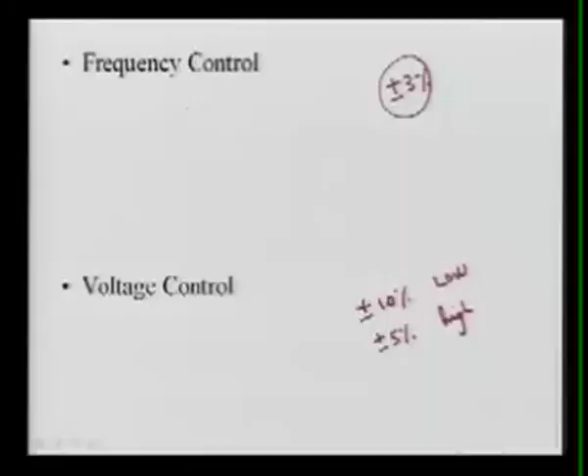So in the modern age, we must operate our system very closely to its rated value. Again, we know all over the world we have two types of frequencies, two levels: one is 50 hertz and another is 60 hertz. 60 hertz is basically used in the USA and Canada area, however the 50 hertz is used in Europe, Asia and most other countries.

So for this nominal frequency, we are talking about plus minus 3%. In the Indian case, we should operate our frequency range within 48.5 hertz to 51.5 hertz. But normally the frequency sometimes even goes below that, and that is not good for the system operation.

If frequency is less, no doubt apart from the requirement for electric clocks and control units, along with other requirements, if you are still operating below that, then it may create system stress, and that may give poor reliability of the system, and also your system may not be stable, and it is very near to the verge of collapse. So our intention is always to operate within plus minus 3%.

This frequency can be controlled in two ways. Active power control is possible at the generation and the load level. This active power is directly related to the frequency throughout the system, so to control the frequency, we must control the real power or active power. In the whole system, we only have two sorts of controls: we are injecting power through alternators and consuming power through the loads. So we can have a complete power system.

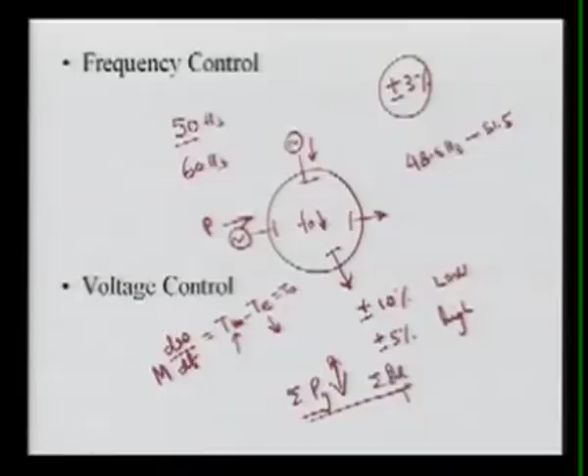And the reverse is also true: if your P generation is less than your demand, what happens? You are drawing more power than your input, so you have an energy deficit. More demand, less generation means the excess demand required is met from the kinetic energy stored in the system, and therefore the frequency of the system will fall, because the kinetic energy is reducing, meaning there is a reduction in speed, and therefore in frequency. So this is true: if the total generation is more than total load or demand, frequency will rise. If your total generation is less than your demand, then frequency will fall.

So the real power is the main source to control the frequency of the system.

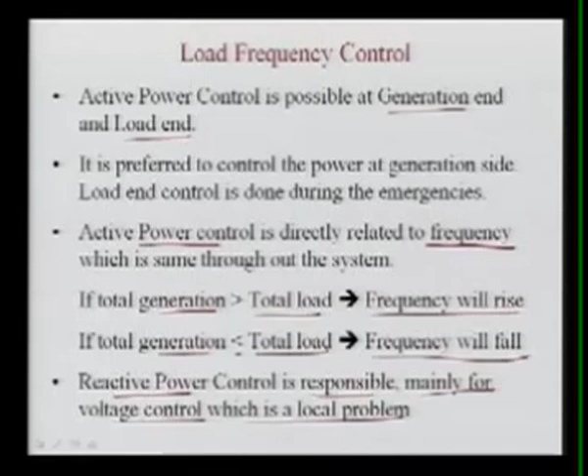This reactive power means we have two powers in the system: real and reactive. An alternator or generator can generate real as well as reactive power, and load can consume real and reactive power. Reactive power control is responsible mainly for voltage control, which is a local problem. This is your load frequency control.

Now how can we control the loads? To understand load frequency control, consider a system where generators are connected into the complete system. A generator can be connected with the rest of the system where several generators are operating in parallel, called an interconnected system. There is also a possibility that a single generator is feeding an isolated load, called operating in isolated mode.

If it is in isolated mode, the frequency variation is not of great concern. But if it is connected with the rest of the system where various generators are operating in parallel, the frequency is very much regulated.

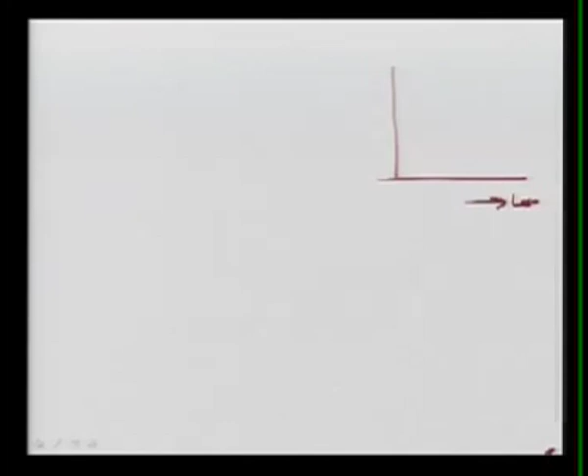Let us suppose here the characteristic: normally all generators are equipped with a speed governing system. Here this axis is your load - if you are changing the load, what will be your speed? Speed is directly related to the frequency of the system.

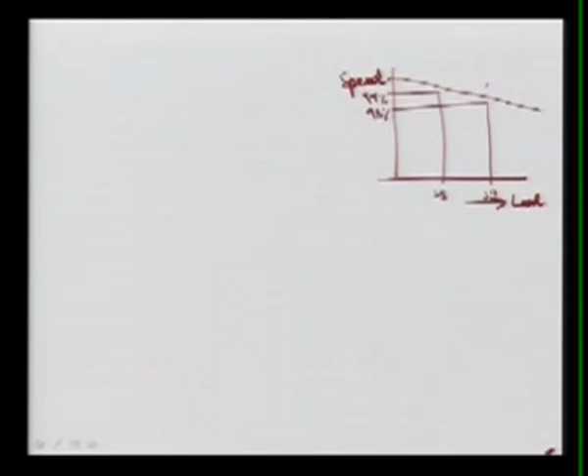This characteristic is normally a falling characteristic. If your load is here, let's suppose 25%, here it is 50%. Now if we are at 100%, at this point let's suppose it's 99% of speed, here it is 98%. So if your load is increased from no load to load, the frequency of the system will fall - the frequency of your generator will fall.

So you can see by increasing here 25% or 50%, frequency is going down. Then what happens? The governor will try to lift, to increase the speed by increasing the prime mover input, and finally will settle to the frequency.

So there is some control, and normally it is a closed loop control. I will discuss the details about closed loop controls. There are various levels of control, and it will try to raise the frequency and maintain it at its rated value - that is the nominal value, or 50 Hertz in our case.

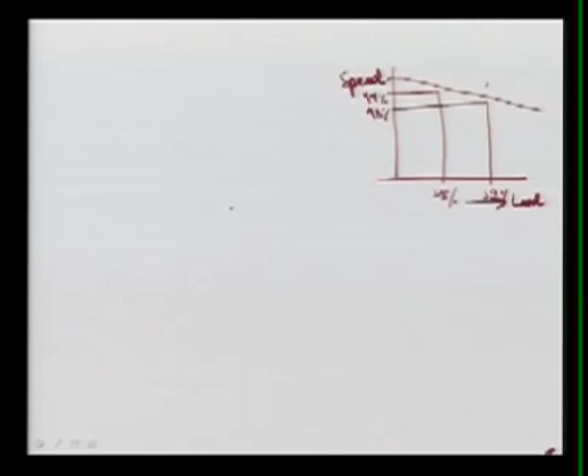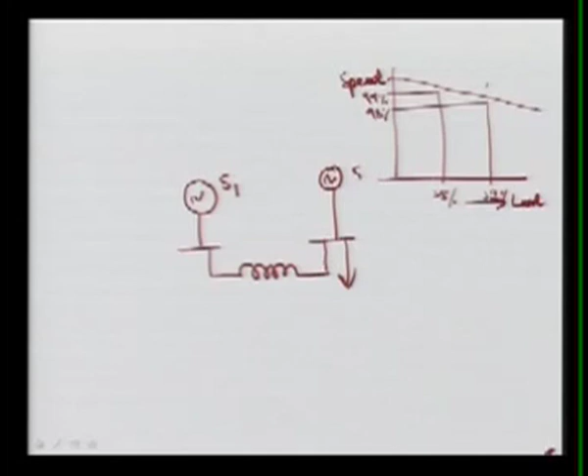Now the load frequency problem - let us see the various types of frequency control we can categorize. Let us suppose we have two generators connected with a tie line, and they are having loads and feeding their own area. Let's suppose this is your S1, this is your S2 generator, and these are the loads - here load, and here also load.

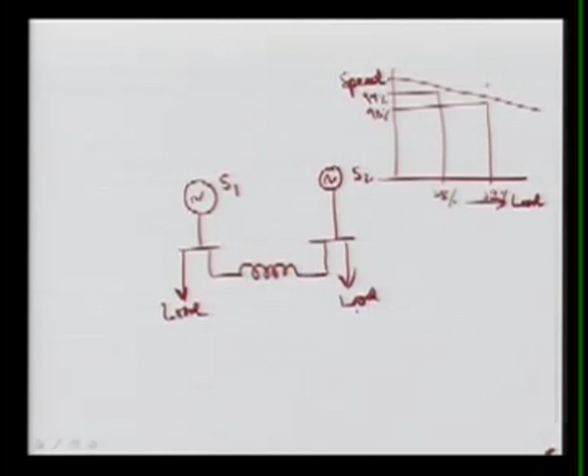Now if there is any change in the loads either at substation S1 or S2, if only one generator, let us say S1, is responsible to control and meet that demand - if load is increased, the system frequency will fall. Then S1 will try to increase its generation, since total generation must always equal total load or demand.

So if the load at generating station 1 is increasing, and only one generator is responsible for taking care of that load increase, then it is called nothing but flat frequency regulation.

The main advantage of this is: whatever load is changing, S2 keeps operating at base load while S1 takes care of the load change. If S2 is very cheap, it should keep operating at its maximum value, while expensive generators like S1 should change their output to meet demand. So we can have economical operation in this sense.

But the problem here is that all the changing load is met by S1, and there is a huge excursion and huge loading that comes on S1. So both advantage and disadvantage of this scheme are there.

Now the other possibility is that if the load is changing anywhere, both generators take care of that increase together. This type of operation is called parallel frequency regulation.

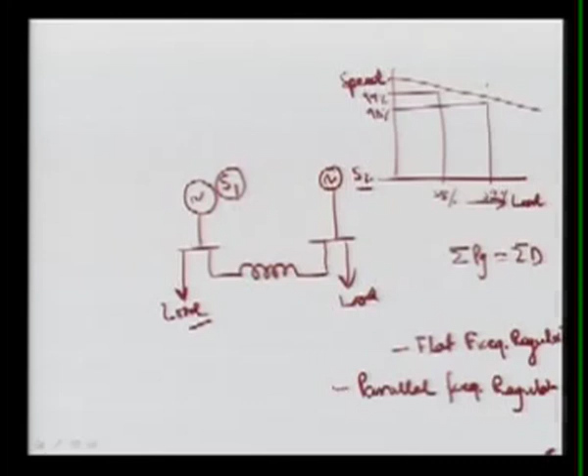The third possibility is that if a load change occurs in a particular area, only the generator in that area is responsible for meeting it. If load changes in area 1, S1 is responsible. If load changes in area 2, S2 is responsible. This is called flat tie line loading.

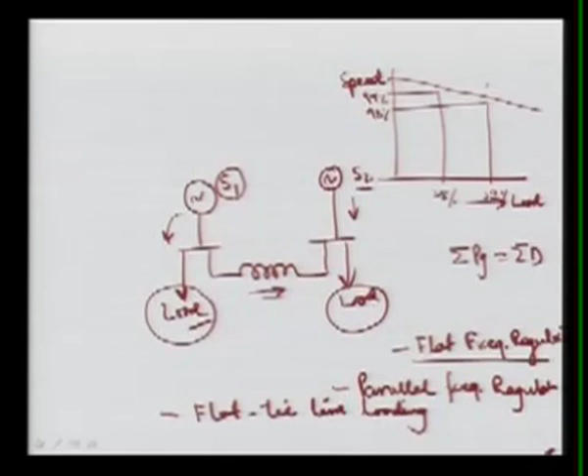This means the tie line power is maintained fixed and not changing. However, in flat frequency regulation, if load here is changing and S1 is changing, then the tie line power is also changing, so it is not flat. No doubt if load increases here and this generator changes, there is no change there, but since this generator takes care of load change in both areas, it is flat frequency. In flat tie line control, we maintain the tie line power flow constant, and the load change in a particular generation area is taken care of by that particular generator itself. If changing in S2 zone, then S2 is taking care.

Normally, if two big areas are connected by tie lines, we try to maintain the tie line power to its scheduled value unless there is some disturbance in a particular area. If one area is in an emergency state, it can request more power, and we can stabilize both systems.

But in normal practice, it is not only one generator; most of the generators take care, and now parallel frequency regulation is very prominent. This means all the generators change their outputs to control the system demand and maintain frequency. This is called parallel frequency regulation.

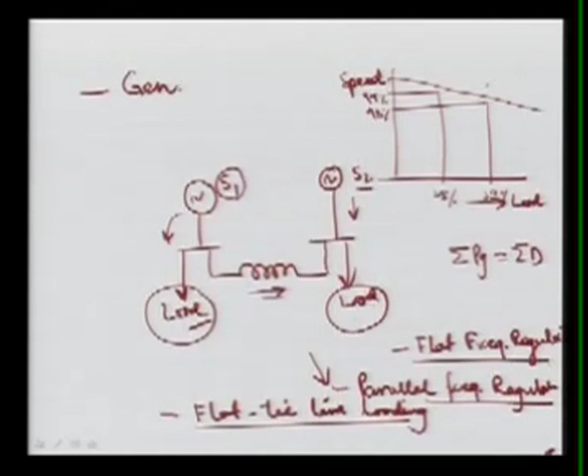Now it is clear that to control the frequency, we must utilize the control aspect of the alternators or governors. As I said in the beginning, we have two possibilities to control frequency: one is your generator output, and the second is your load aspect.

If your operating frequency is higher than your nominal frequency F0, what does that mean? It means your load is less and your generation is higher. So you can reduce the generator output to match the demand and reduce the frequency. Another option is to increase the load to again balance generation and load.

Now increasing the load is not in your hand. It is very difficult to increase the load unless you ask somebody to take more load, but normally this is not practiced. Load increase is not possible, so what we do is ask the generators to reduce output to maintain the frequency to its rated value.

Similarly, if your operating frequency is less than your nominal or rated frequency, which is 50 Hz in our case, this shows that your generation is less than your demand. So instead of reducing generation, we can increase the generation, or we can go for reduction in the load.

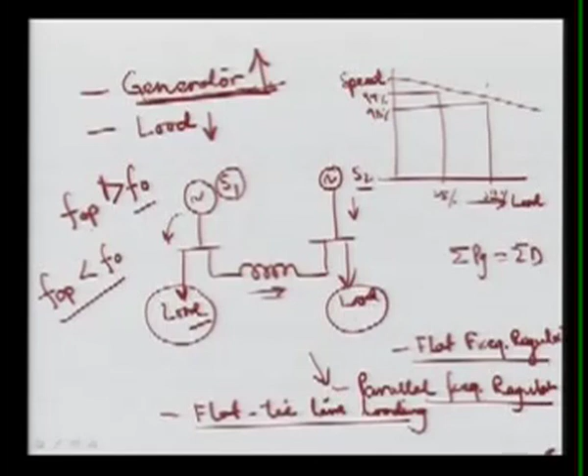So normally we go for generation control, and the generators are equipped with governors. We will see how the governors work through the generator control loops. In generators, normally we have two loops: one is the control to the turbine input, where the inputs are steam, gas, or water. These load frequency or generation control loops are known as load frequency control. Different names are used in the literature, but the purpose is to control the system frequency, so it is also known as the LFC problem.

Or it can be called automatic generation control. AGC is also very popular, and sometimes people call it automatic load frequency control, ALFC, or here we can call it megawatt frequency control loop, because we are changing the megawatt, frequency is changing. So we can say megawatt frequency loop.

Another control loop in the generating stations is called excitation control, and that is related with the control of the voltage of the power system. So the excitation control is also known as the AVR, because we are controlling the reactive power with the help of excitation, and what we are achieving? Zero voltage error. So it is called QV control.

This is very fast because there is no rotating part. However, the ALFC or AGC, that is frequency control, is a slow process, because the turbine inputs, and turbine is a mechanical device, rotating, coupled with alternator, and then electrical power output comes out. So the dynamics and time constants of the turbine, the steam pipes, steam flowing, as well as the alternator are accounted for. So this is slow. However, this excitation control is very, very fast, because we only have the exciters, which may be static exciters with no rotating part, so it is very fast.

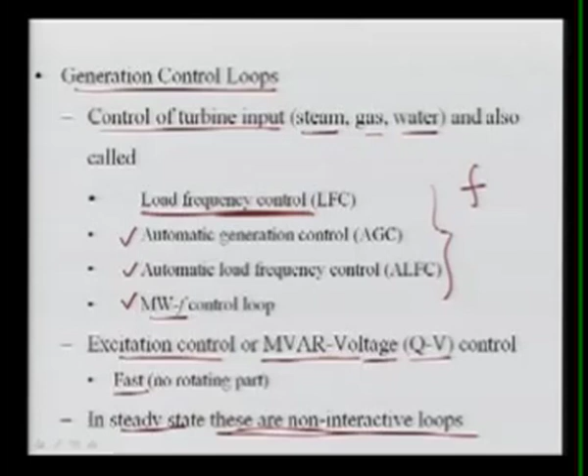To see here, now look at the various control loops. This is your alternator. This alternator is coupled with the turbine. There will be several stages of turbines depending upon the output rating of your alternator. If you are using a 500 megawatt alternator, then there are 3 turbines: high pressure, intermediate pressure, and low pressure. So there are 3 stages of turbines, all coupled together, written here as the turbine system. This turbine system is a mechanical rotating device.

The input to this is steam, and since there is an expansion of the steam, work is done by this turbine on the system. The turbine will try to rotate, and it will try to rotate the complete mass of the system, and the alternator will be rotating with the help of the turbine shaft, finally giving the power output, that is P.

So what is happening? Now to change the speed, we have to change the input flow to the turbine, and that input is steam in thermal power stations, gas in gas power stations, and water in hydropower stations.

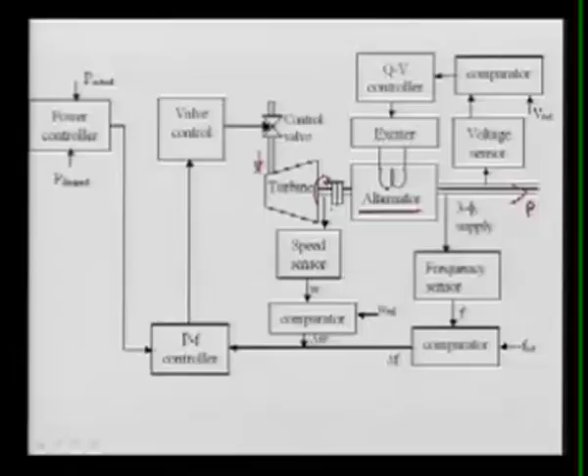So to control this, we have to measure the speed of the system, or we can measure the frequency of the system. Here we are measuring the speed with a sensor, and this omega is coming. This omega is compared with its reference setting speed, and if there is any change, we get an input signal, that is change in omega, which is basically the speed. This is then fed to the power frequency controller, and this controller changes the valve control unit.

This unit will try to change its input to the turbine, meaning it will open or close depending on the requirement. If the speed is higher, this value will be positive, and the controller will try to close the input to the turbine, reducing the steam passing through it. So the mechanical power is reduced, and finally the speed will settle down to its rated value. In other words, if frequency or speed is less, this will try to open more, so more steam will pass, increasing the mechanical input to the turbine.

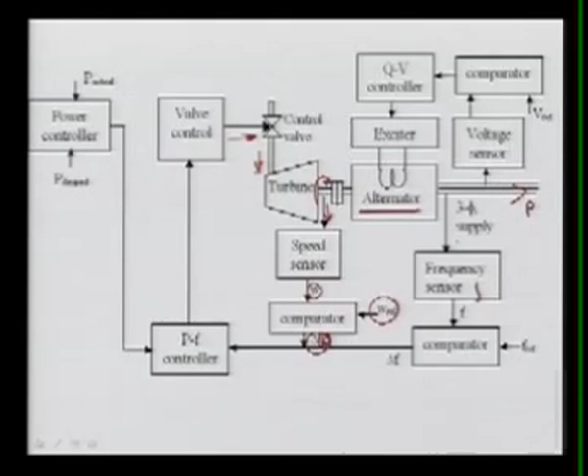Another way is we can sense the frequency of the system, since it generates a three-phase supply system. So frequency is measured, and this frequency is compared with the reference setting, the rated value, or F0 of the system supply. If there is any discrepancy or mismatch between the measured frequency and the reference value, we get another signal, and that signal also comes to the PF controller.

So this control is basically called the real power frequency control loop. So you can say this is a loop, here this is a loop.

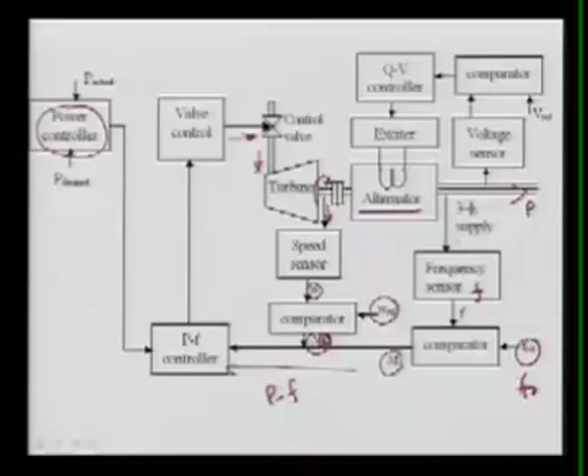Now, normally the system is equipped not only with relation to frequency. Sometimes the utility wants to increase power irrespective of system frequency, meaning they want manual control, as opposed to automatic control. So if you want to change the output of the alternator manually, we use what is called the power controller. If you want to increase the power, we measure the power output, and if there is a difference between desired and actual, it goes to this controller which tries to correct it.

So here we have both automatic and manual control, normally called the raise command. We'll again see and model the governing system, which is basically related to the governor. Valve control is nothing but the governor system, meaning we have to move this mechanism so that the input to the turbine can be changed.

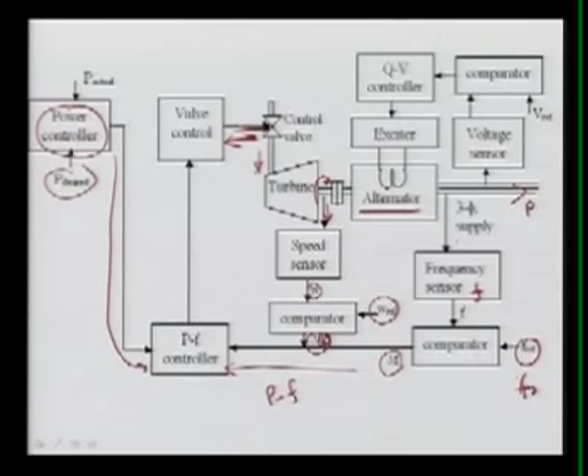So this whole system I discussed within this boundary is called the real power frequency control, or LFC control, or ALFC control, or AGC, and so on. Another control loop is where we sense the voltage.

This supply voltage is sensed, we measure the system voltage, and use a comparator to compare it with a reference value. Normally the terminal voltage of alternators is set at a pre-specified value, maybe 1 per unit or sometimes more. If there is an error signal, meaning a change in voltage is required, the QV controller acts and changes the excitation system, which changes the excitation of the alternator and thus the terminal voltage. This loop is called the QV loop, or sometimes the MVAR voltage control loop.

Now let us see how we can achieve active power control. In this load frequency control loop, we have three major parts: one is the speed governing system, normally called the speed governor; another is the rotating component, consisting of the turbine and the generator, which rotate due to mechanical rotation; and we also have the load and the power system.

So we have these three major components to classify: the load frequency control loop's speed governing system, the rotating components—that is, turbine and generator—and the load and power system, which is the electrical part. The turbine and generator, being mechanical, are modeled together as rotating components. Then we model the speed governing mechanism and its characteristics, and then we model the load and power system together, so we can analyze these control loops and see how load frequency control works.

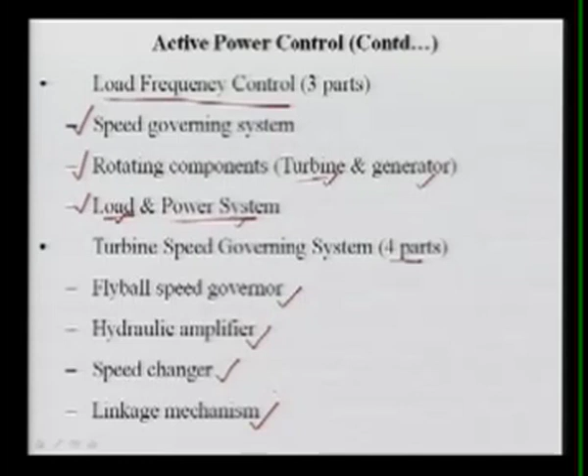Now the speed governing system, or turbine speed governing system, consists of four parts: first is the flyball speed governor system, hydraulic amplifier, speed changer, and various linkage arrangements. To see it, you can look at this diagram.

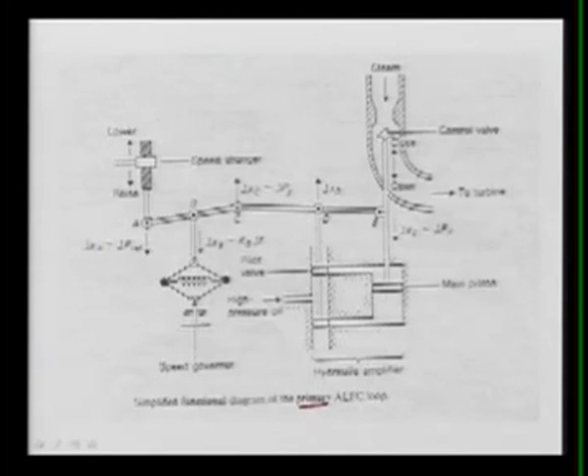This is basically the simplified functional diagram of primary ALFC. I'll explain later why it's called primary, because there are primary and secondary control loops, and this is called the automatic load frequency control loop. To understand this, the main purpose is to change the frequency, which requires changing the mechanical input to the turbine, done by closing or opening this valve. If it's closed, less steam passes, mechanical input is reduced, and the system frequency will decrease. So we just change the input to the turbine, and for that we have various mechanisms, one being the speed governing mechanism.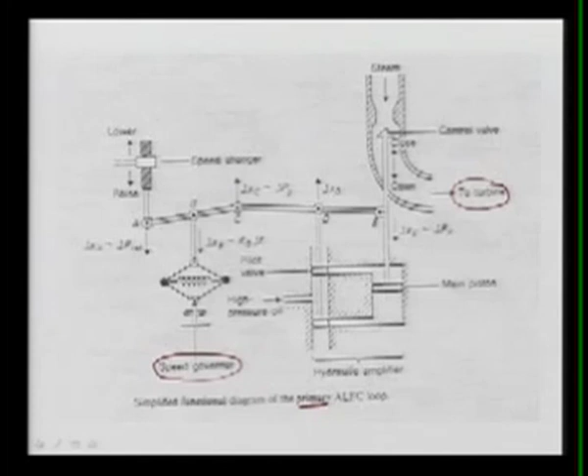Here you can see this arrangement, which is what we are doing: we measure the speed, and this arrangement is called the flyball speed governor. What happens here is if your speed is more than desired, this value will change, and finally the movement of B will occur. I'll come to whether this B will increase or reduce—we'll see that later.

But if your speed here is changing from the base case, the movement of this B will be changing depending upon the more speed or less speed, and then by this mechanism here, this movement here will be changing.

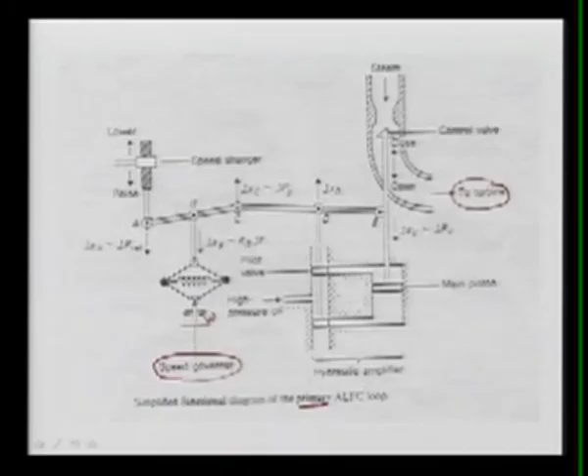Another arrangement is a manual control, meaning we can intentionally increase or reduce the power output of alternators irrespective of the system frequency, and by that we have the lower and raise commands. If you want to increase the power, you use raise. If this value is shifting down, meaning the position of A is going down, that is called change in P ref, then power will be increasing. How will it be?

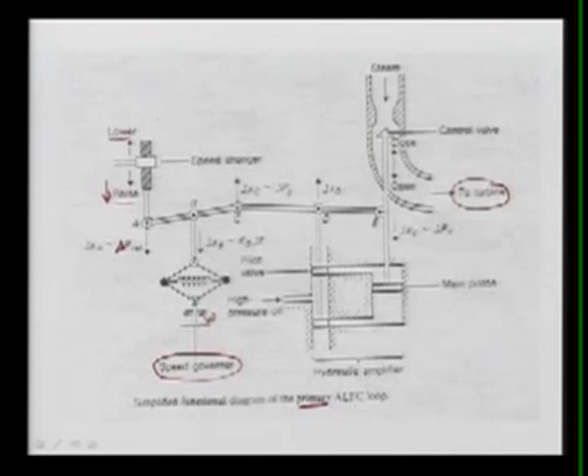It is functional. To understand this, let us say we are giving the raise command, meaning we are trying to increase the output of the turbine, meaning we are increasing the steam which is passing to the turbine.

This mechanism is called your speed changer. So if I want to change the frequency, I want to change the power increase, by the raise command, we are not concerning about the change here. What will happen? The position of A will go down, or the change in XA position is directly related with the change in the power reference that you are changing. So if this is going down, and B is constant, we are not changing B, what will happen? The position of this C will go up.

This is a linkage mechanism. If A is coming down, C will go up if B is constant. So what will happen if this goes up? Now you can see if this is going up, your XD here will also go up.

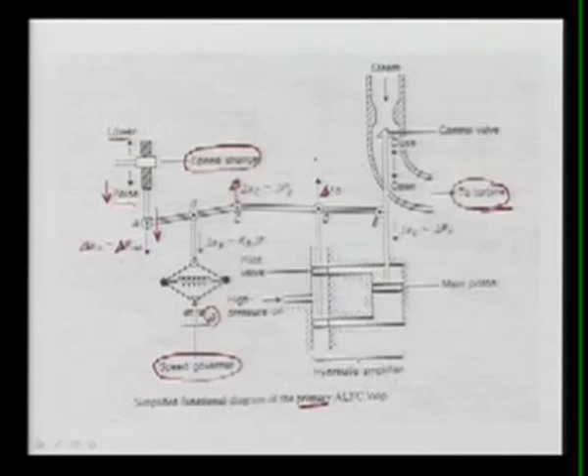If XD goes up, here we are putting a high pressure oil. You can see the high pressure oil is coming, and this is going up, then the direction of this oil will flow like this, and try to flow here. So what will happen? It will try to exert a very high pressure on this main piston.

We have here the pilot valve system, that is a movement. So this will go down, meaning the change in XE position will come down, and finally if going down, this position is opening and more power or more steam is passing through the turbine. Thereby we are increasing the output of the turbine, and finally increasing the electrical output of the turbine.

So this is one way that various linkages, various positions are changing by change of even one condition. Similarly, we can also see the speed governing system approach.

In this condition we saw that if we are giving the raise command, we are increasing the power output of the alternators, and if raise command is given, we are changing the position of A. Now if we assume that the change in position, I want to write this XA, change in position at point XB, that I can say XC, here change in XD, and change in XE, we have this 5 linkage mechanism.

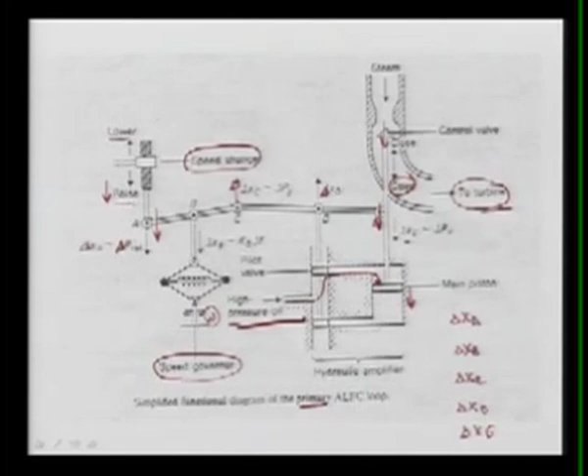So what is the movement for which linkage, that can be related by plus and minus, so that we can model it later on, we will see how it is useful. Now if I take the downward movement as positive, no problem, you can take it as negative. It is better to understand because we are increasing the power, so it is always better to take the downward movement as positive.

So here what we are doing, if you are giving the raise command, the movement of A is downward. Positive value shows that the movement of that linkage will go down, negative means it will go up. So here, as I said, A will go down.

Now the B, as I said, it is not the speed governing system, we are not taking that into consideration. We are assuming this is constant, this linkage is fixed. So your change in position B is 0, meaning it is not moving at all.

Now if A is coming down, C is going up, meaning the C position is changing upwards, and that is against our convention. I said that if position movement is going down, then it is positive, if it is going up, it is negative. So your XC here will be negative. Now your XD is also going up, that is also negative. However, the movement of your XE is coming down due to this pressure, so it is positive.

Similarly, if we are giving the lower command, all this I have written is for the raise command.

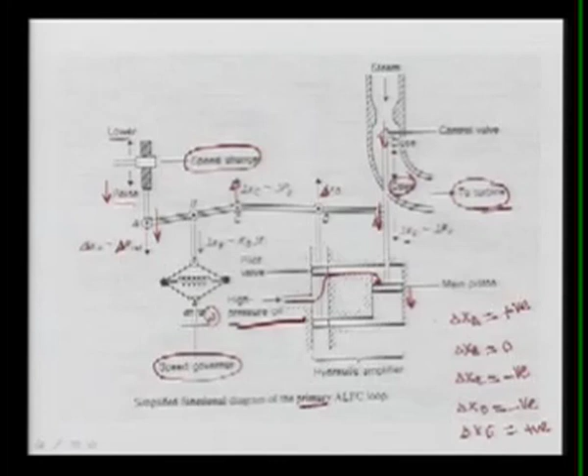If you want to give a lower command, meaning you want to reduce the output, the sign of the various positions will change. A will go up, meaning it will move up, so it will be negative. B will be 0, no change in position. The position of C will go up, so C will be positive. D will also be positive, and E will become negative, and it will try to close. So this is for your lower command.

This is the change in position. Again, I am not writing how much magnitude it is going to change, because it depends upon several factors. It depends upon the length of the linkage, and how much it is regulated. So it will be decided later, and several constants come into the picture.

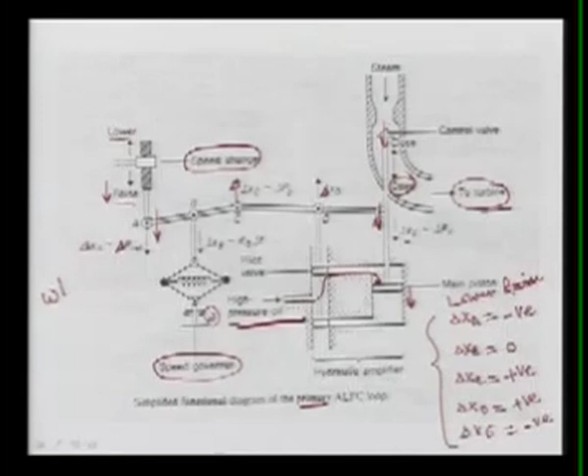So this is basically what I explained for giving a raise or lower command to increase the output or open the steam valve. Now let us see that the frequency of the system has gone up, meaning the frequency omega is directly related with that. So if this has gone up, what will be the position of the various linkages? Again I'll write here change in XA, change in XB, change in XC, change in XD, and change in XE.

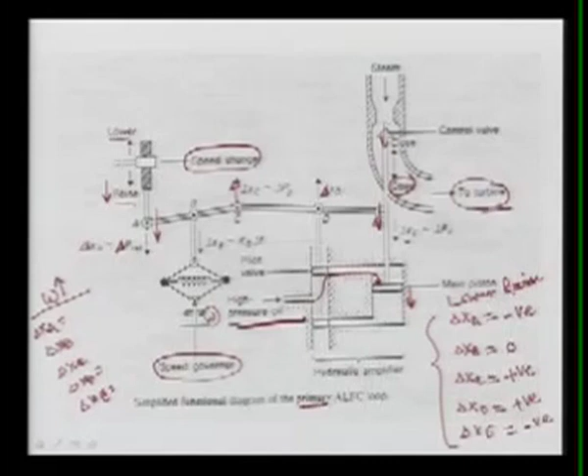Now let us see, starting from A. We are assuming that A is not changed, because we are neither giving raise nor lower command, it is fixed to its rated value. So there is no change in position A, it will be 0.

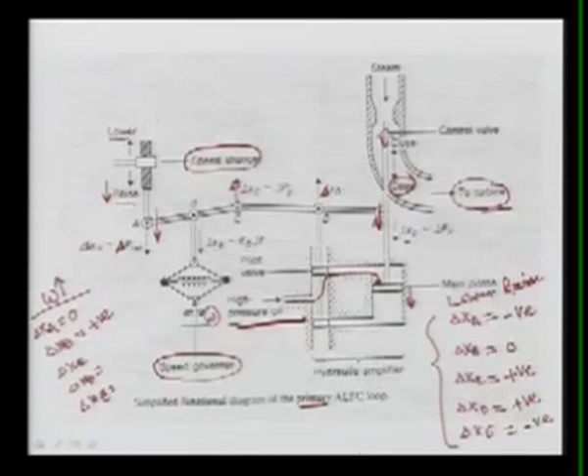Now the B position, if speed is increased, what will happen? This spring will try to extend and reduce your XB position, and here it will be positive. Meaning if your frequency is reduced, this spring will try to close, and it will go up or down depending. So the change in XB position is directly proportional, with some constant, to the change in frequency. If frequency is more, this is positive. If frequency is less, then it is negative.

Now if change in XB is positive, it is going down, then C, if it is going down, will also go down, because this whole linkage is taking A as a center. If B is going down, C will also go down, and the movement is in the positive direction, that is downward.

Now if C is also going down, what will be D? D will also be going down, and here it will be positive. So if D is going down, what does it mean? You can see if D goes down, this pilot valve will move down, and the high pressure oil will try to move and exert pressure on the main piston, and this piston will try to lift the position of E upwards and try to close, so here it will be negative.

So what is happening is that the position of E is going upwards, meaning it is closing the steam input to the turbine, and we want that if the frequency is more, the input to the turbine must be reduced, and that is what we are achieving here. So this is the linkage mechanism.

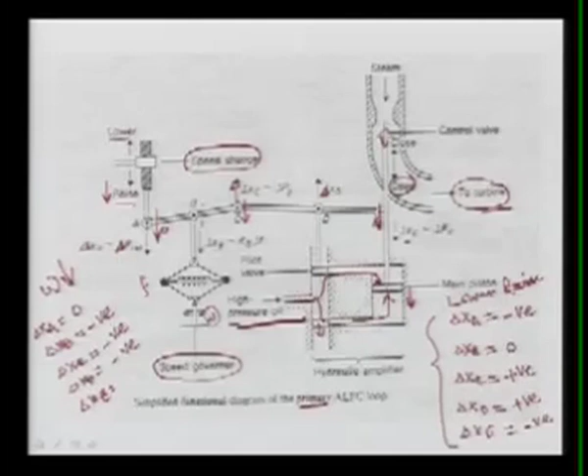Here you can see now the oil pressure will come here, and position E will be going down, and it will try to open the inlet to the turbine, so more steam or water, input of the turbine will be increased, and then we can increase the frequency. This can be summarized again, considering two cases, and based on these two cases I'll write the equations for this governing system.

Already I explained the speed changer is given the raise command, and the speed is constant, that is omega is constant. So we can have these changes in the positions. Again, the positive movement is the movement in the downwards direction, I have taken as positive.

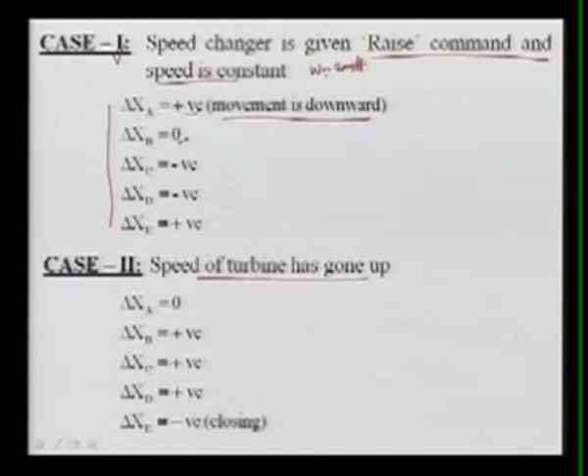So change in A, if we are giving raise, it is positive; no change in position B because the speed is constant. C will go up, D will go up, and E will be going in positive direction, that is downward. Now if speed of the turbine has gone up, that is omega has increased, and this raise or lower command is fixed, not given, so position A will be 0. Now B will be going down since frequency has gone up, C will be going down, and D will also be going down, but this will be going up, trying to close the input, and the frequency of the system will be restored.

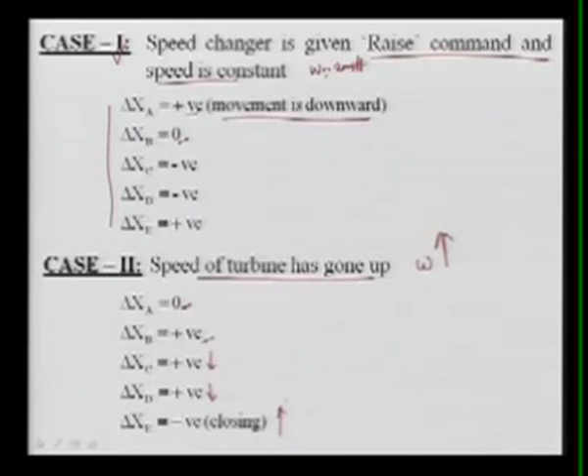Now with these two cases, what we are going to do is model this governing system. Change in position C is nothing but a function of two things, meaning the position of C is controlled. If you see this figure, change of position C is related with the change here as well as change in B.

So position A is changed by this command, and that is nothing but changing your power reference, that's how much power you want to change. Another is the P reference, and another is the system frequency. So these two changes in position are directly related to changing the position of C.

Now you can see here, I can write the position of C as the summation of some constants. The change in frequency with some constant K1 gives the position of C, minus K2 times the change in PC, that is a reference value.

Why is it minus? You can see we have two options for the change in position, simply looking at the linkage mechanism. So this is your A, this is your B, this is your C. Now if you are changing this, moving in the positive direction, with this fixed, then this moves in the negative direction, that is oppositewards. So if you are changing more power, this term is negative.

However, the position of C is the reverse of the position of A. So we have written the change in position C as a function of the frequency and the change in power, that is PC. It is nothing but the change in PC equal to the change in the P reference setting.

So we can write the change in position C as a function, an algebraic equation in terms of K1 and K2 constants, and these depend upon the length of the arm, how far it is moving, so it depends upon the movement. These are the constants, and once designed, K1 and K2 can be obtained. So this is equation 1.

Another thing is we have the position XD. XD is also linked with D, that is the D position, and we can see this XD position: if C is going down, D will also be going down. So the change of position XD is related with the position of C, which is D, and here let's suppose we have E.

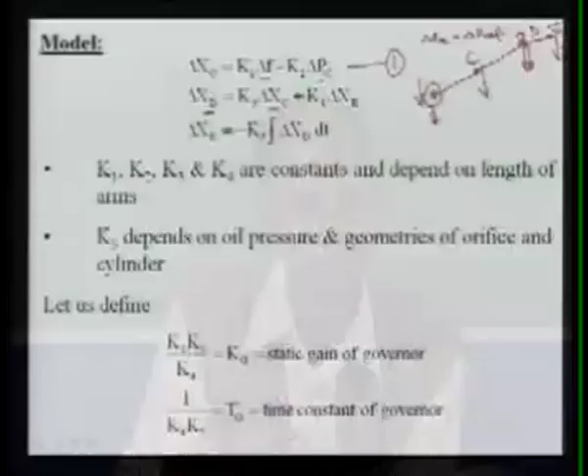At the same time, the change in the E position is negative relative to the XD position, and that is the integration of the change in position. Why is it so? You can see again with the help of this diagram. Now what happens here? Earlier it was moving up.

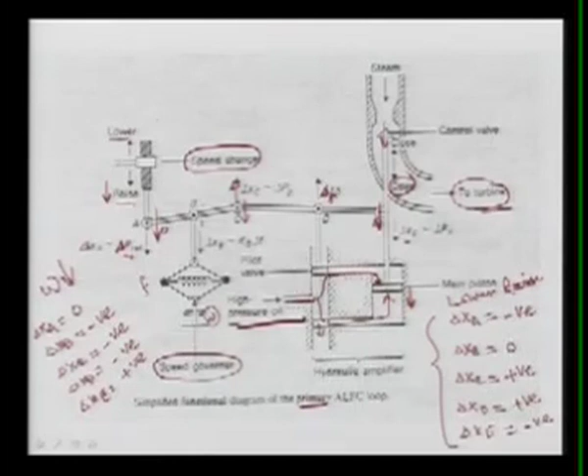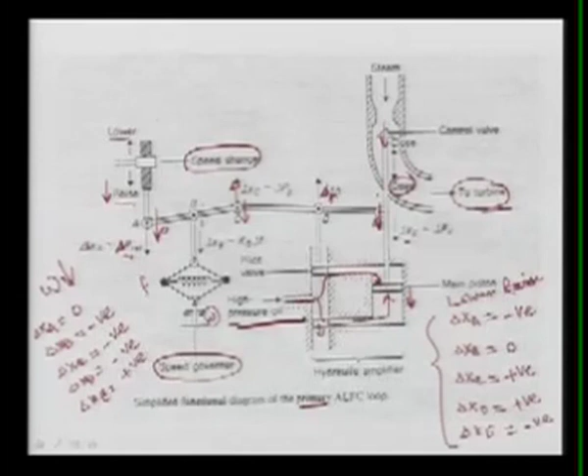Now what is happening? If it is moving up, you can say the oil pressure is coming here and it is going down. One way, if this D is moving up, E should move. But by moving this here, the oil pressure is coming here, it is trying to reduce in the negative direction. So this movement of E here is directly related with XD and with the negative direction, meaning if it is going up, it is moving down.

But at the same time, here this oil pressure is there, and it is a continuous movement. It is taking time, because some piston mechanism is there. How much time will it be traveling here to its settled value, meaning the pressure is equalized. This pressure and this pressure must be equalized. So it will take time, and that's why it is an integration time that we have considered.

And here we can write that the XE position is negative, meaning opposite direction of XD, with the integration, and that is related with the time. So the coefficients K1, K2, K3 and K4 are constants and depend upon the length of the arms. However, this K5 depends on the oil pressure, geometry of the orifice, and the cylinder of the piston valve, as well as the orifice of the main valve system. So how much pressure is going to equalize, the K5 depends upon that.

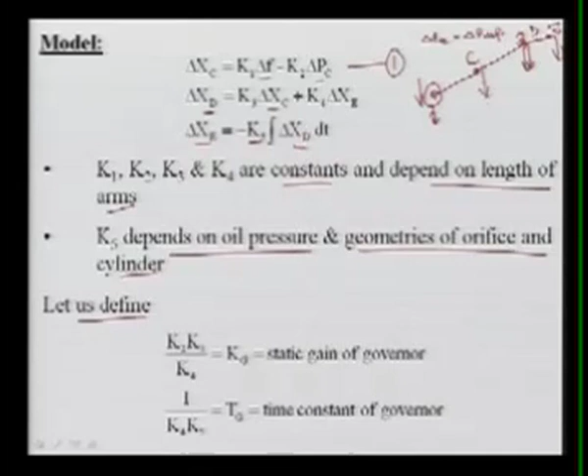Now if we define the constant K2, K3 divided by K4 as Kg, it is normally known as the static gain of governors. And similarly 1 upon K4, K5, that is Tg, which is called the time constant of governor.

So with these we can derive an equation in Laplace form. Taking the Laplace of these equations, the change in Xcs, taking Laplace, is nothing but K1 times change in frequency, that is change, minus K2 times change in Pcs. Similarly, change in Xd will be equal to K3 times change in Xcs plus K4 times change in Xes, and change in Xes again is equal to minus K5 times change in Xds, divided by s because it's an integration.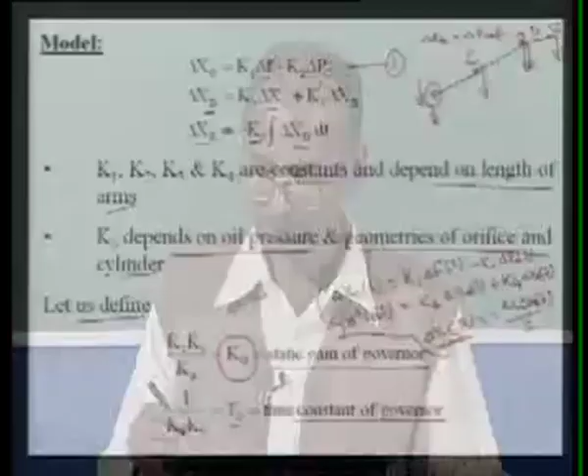So what we can do now is, by simplifying these three equations, we can have a relation with Xe, because Xe directly gives the input output, how much the orifice of the steam is opened. So we simplify, putting Xd into the equation, we get a relation between Xd and Xe. From there, Xd we put into this equation, we get change in Xe, which is a function of change in Fs and change in Pcs, and we get this expression here.

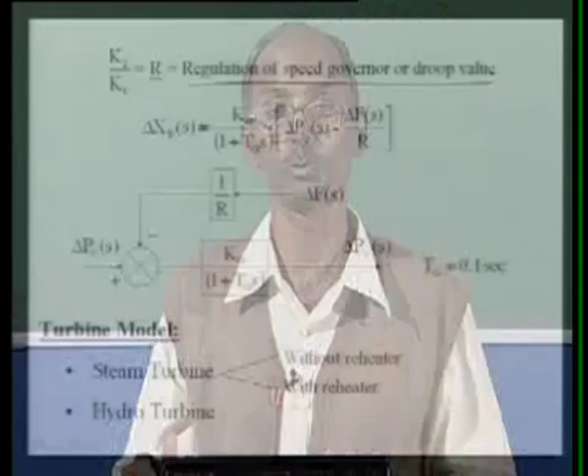Here this K2 upon K1 is normally known as R, and that is nothing but the regulation of speed governor, or droop value. Droop is a very important characteristic, K2 upon K1, that is R. This is basically related, we will see later how R is very useful to control the frequency of the system, because this is the characteristic of the governing system, who is taking part and how much output is changed. Basically this R is a very valuable criteria.

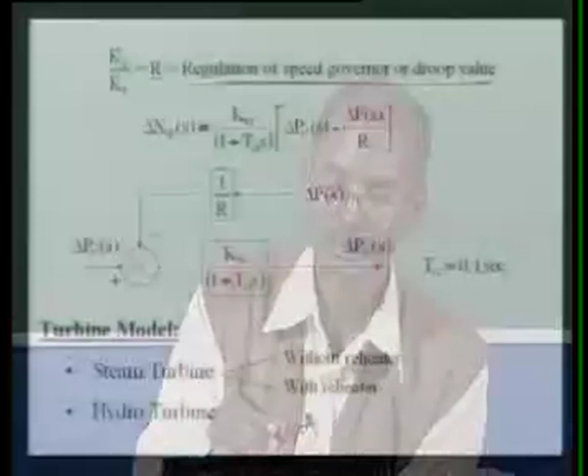However, the Tg, that is the time constant, putting all the constants and simplifying, we can get the change in Xe, in the Laplace domain, that will be equal to Kg, that is the gain of the governor, over 1 plus Tg, that is the time constant, multiplied by s, and here we get the change in Pc minus change in frequency, Laplace, divided by R, that is the regulation of speed governor, or the droop value. This equation can be represented into the block diagram, and the block diagram you can see here, this is your block diagram.

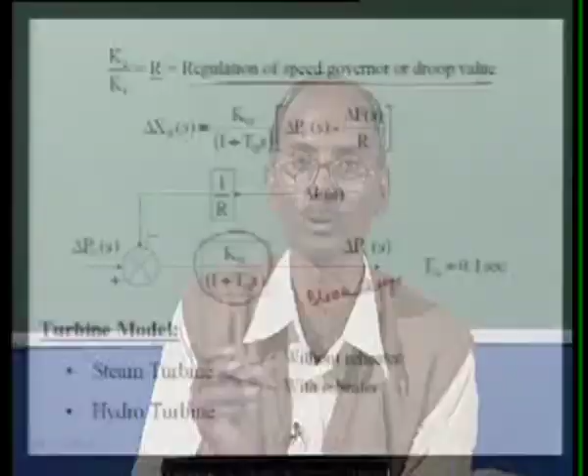So this block diagram basically you can see here. What we have done, this change in frequency divided by R, this is 1 upon R, that is coming here. This Pc is positive, this is negative, and that is multiplied by this governor block diagram, you can say transfer function. That is the input output relation in the Laplace domain, your transfer function, and this is giving your change in position E, and this change in position is directly related to the change in valve power, means how much is changing. Normally this Tg is 0.1 second, and the gain depends upon different criteria, and also depends upon k2 upon k1. So this is basically the model, or transfer function model, of the governing system.

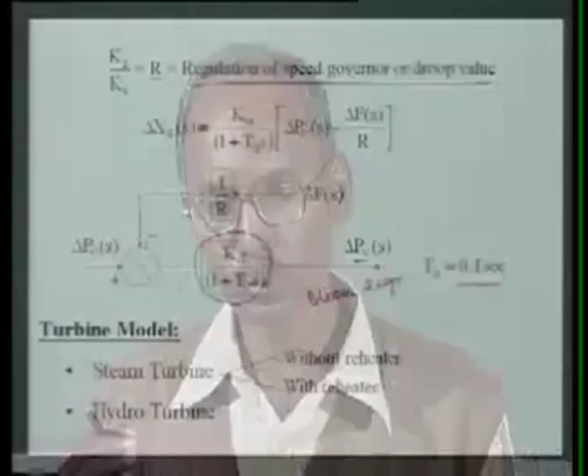So this power, that is valve power, means we are changing the input to the turbine. We have the raise and lower command, means how much reference you are changing. This is the frequency related component that is coming here, and the governing here, that is the opening or closing of your valve, and this is going to your turbine. So the turbine, you can see here, we can model like this. So this which is coming here is nothing but change in terms of PCS, and then this turbine is giving some output, and that output is going in terms of rotation, and we will see here how it is related in this model of the turbine. So this is basically turbine. So this valve power, that is V, is coming here, and it is going in this way.

So now we require to model this. Before that we have already modeled and completed the governing system. Now we are modeling the turbine system here, and the turbine model again depends upon which type of turbine we are going to use. It may be steam turbine or hydro turbine. For example, nuclear power stations also use steam as an energy transfer medium, so steam turbines are common. Again, slight deviation depending on which type of steam turbine we are using. Hydro turbines are very simple. However, these steam turbines may or may not have the reheating facility, so we can have reheating or not, it depends. Then we'll have a different approach.

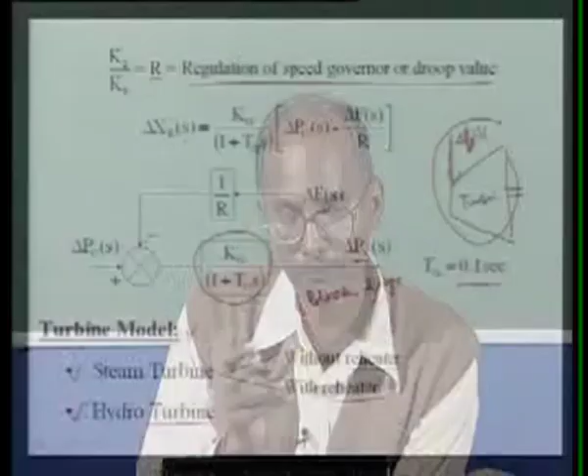For the reheating, what happens is the steam is coming here, for example if you are having different stages. Let us suppose this is your turbine. This is your HP, that is high pressure turbine, and now it is connected with your IP, that is the intermediate pressure turbine, and then you will have your LP, that is low pressure turbine, and finally you have your alternator. So this is a diagram: LP, IP, that is intermediate pressure.

So here steam is coming, steam is expanded. What happens is this steam which is coming out from HP, here basically this is your boiler, let us suppose. So from boiler it is coming, then it is again reheated, means it is going back, and then after that it is coming to IP, and from IP outlet it is coming to LP, and then finally here it is collected and it is going again to the boiler. So this is a steam diagram.

So what is happening here, the exhaust of the steam which is coming out of the HP after doing the work has a very low temperature and pressure, and there is a chance that the blades of these turbines, which are very very expensive, will damage. So what we do, we send it back to reheat. It will take some time, going here and then coming back, and then finally it is going to IP. Again we will see this in the modeling.

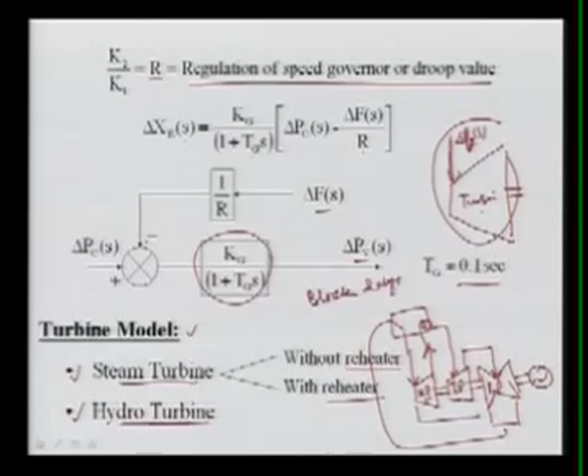So in this module, the first lecture is devoted to modeling of the speed governing system. We model this in terms of Laplace transform to analyze the performance of the speed governing system, or load frequency control, which is very very important. So here I represented the block diagram for the governing system. Now the next is the turbine model, and for turbines we either have the steam turbine or hydro turbine, or sometimes for analysis purposes we go for a very simple model of the turbine, and that turbine model will be discussed next. Here, with both reheating and without reheating facility, I explained what is reheating, means the steam which is coming out from HP is reheated before passing to the intermediate pressure turbine, then it is called reheating, and due to this the travel of steam takes some time delay, and we'll see the power output of these two, how it is related. Thank you.